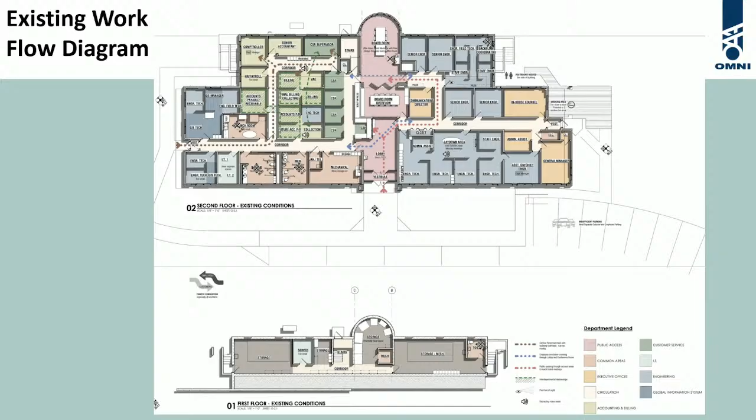The existing basement plan you can see here on the right side. It's mostly mechanical. The left side is IT and storage for the most part. You do have a little bathroom down there as well.

This would be the new layout. The existing here, this all pretty much stays the same. The IT space may get expanded a little bit. We're talking about adding a shower down here in the basement. Over here is the new piece.

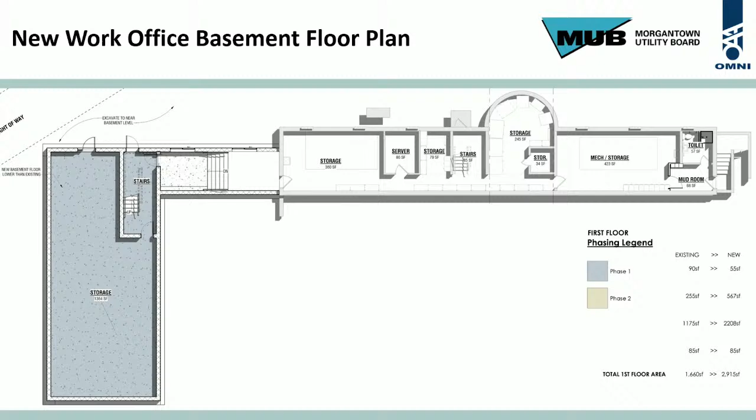So you're going to come out of the existing basement door down into this basement storage space. We have the ability—you'll see on the second floor plan, above this is the lunch space—to come down these stairs and possibly create an outdoor space here for your staff. The existing plan has a little outdoor space over here on this side, and that space is going to become interior space.

And you can see that here—that's this space over here, in here, and then this new addition down through here. You've got offices over here. Again, none of this has changed since most of you have seen this before. There may be a few little changes within the plan, maybe 4 or 5 little changes.

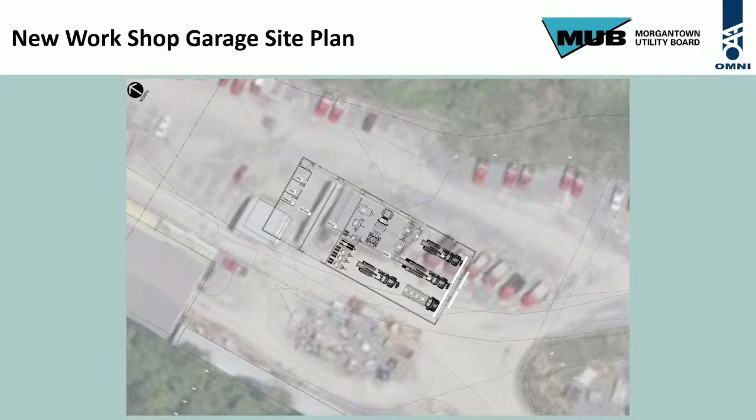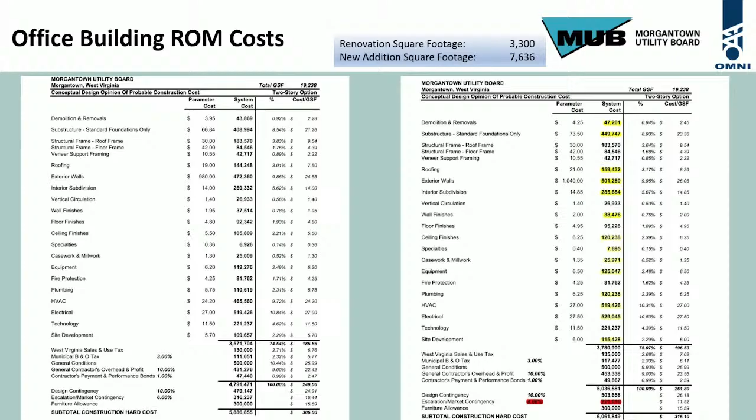How confident are you now in the landscape and topography here for being able to fit the building on there? I know that was a concern every once in a while on how we're going to be able to fit on the site. Yeah, the big concern was this addition over here and how quickly the grades fall off right here, and if there were some minimal slip concerns because of that.

We had looked at that most recently, and I presented that to the team last week, and we think we're okay. We talked about possibly doing a retaining wall for the walkway or using the building wall as a retaining wall, and I think the best option is to use the building as a retaining wall. The foundations in these back corners will go a little deeper, and that'll let that sidewalk and stairs sort of just rest on natural grade.

The electrical line doesn't pose a problem during construction? We're staying out of that right of way, just barely out of it. Now, will they have to set up some scaffolding to do the brickwork? Maybe, and drive some equipment back around there, yes, but we've stayed out of the right of way distance.

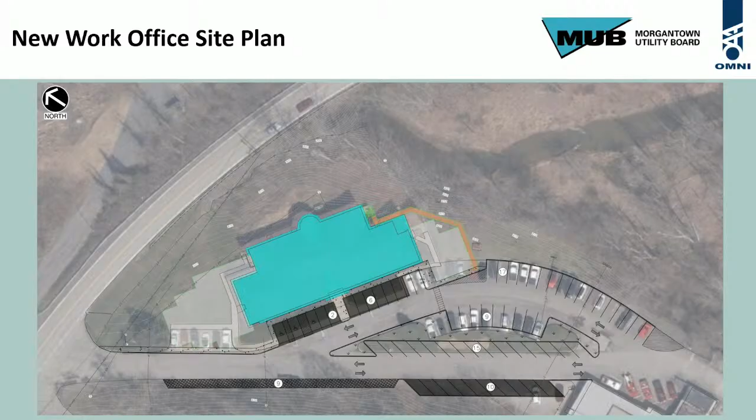Has much changed as far as the office space in the last 2 years? No, not really. We've tried to open up the lunchroom a little bit, make it a more pleasing space where people actually want to go in there and sit down. Design-wise, we're going to do a little bit more there, but we've kind of opened that space up, maybe get it a little more like a cafe style, just to make it more comfortable. We're adding some glass on the inside, just to make it more pleasing and feel more open. You don't really have very high ceilings over here, so I think trying to open that up. We've talked about some of that, and I think a couple people office-wise have moved back and forth, but I think that's about it.

The other question I might have is about fitting the current staff in here. I know that can happen, but how much additional staff space will be available for additional positions down the line?

Yeah, I think there's plenty of room for growth, both on the engineering side and on our business side. Okay, we'll have room for growth.

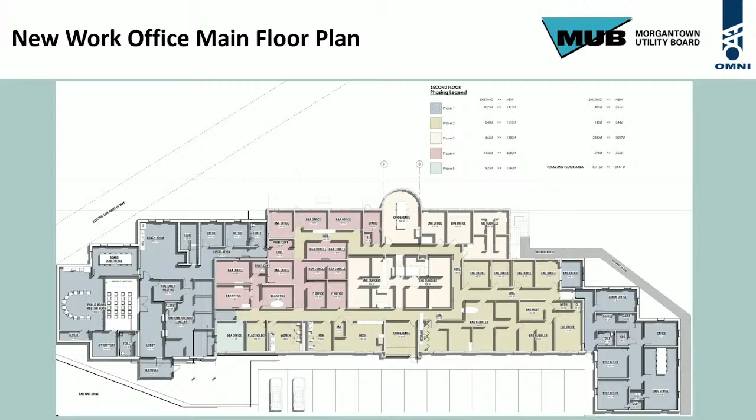How about the garage? We think that it will be adequate. So from the initial discussion, we did not take into account housing our tractor. Once we started discussions with Omni and went through an actual walkthrough looking at the equipment, we realized we really need to house the tractor indoors. We don't need that piece of equipment just sitting out in the weather all the time. So we did expand it just a tad, but I can't see us at this point needing any extra space than what we've got for some time, and we still have room out there if we need it.

Is this building scalable, the workshop, if needed in the future? Yeah, being that it's a pre-engineered building, more than likely this side and this side of the building will be the bearing points, so you could expand on this end of the building and also on this end. Okay, that's good. Just basically make the building longer.

My thought is vehicles have not gotten any smaller since the 1990s, and I imagine we're not going to turn that around going forward either. As you know, our newest vac truck is a beast.

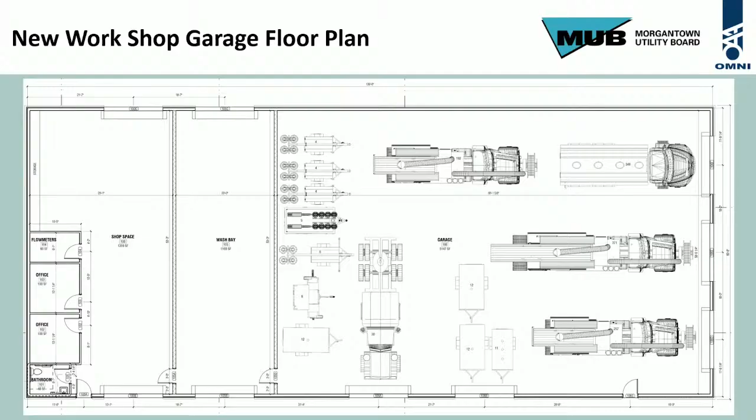Next, under old business is the Upper Popenoe Run Stream Restoration and Sewer Line Replacement Project, presented by Ken Hacker.

Good evening. For those of you who don't know me, I'm Ken Hacker, senior engineer here at MUB. I've been working on this project for quite some time now, maybe beyond a decade. So it's finished — Larita has completed the project, done a fantastic job. We've got a really good finished product here.

I'm going to run through the extents of the project, show you our as-built on our GIS mapping here real quick, and run through some before and after pictures that do a pretty good comparison. These stream projects are pretty neat — you actually get to see the finished product. So much here at MUB gets buried, put away, and you never see it again unless there's an issue and it gets dug up. So these stream projects are pretty cool. I think this is the third or fourth one I've been involved in since my time started here at MUB. I didn't know I was going to be involved in stream restoration projects so much, but here we are.

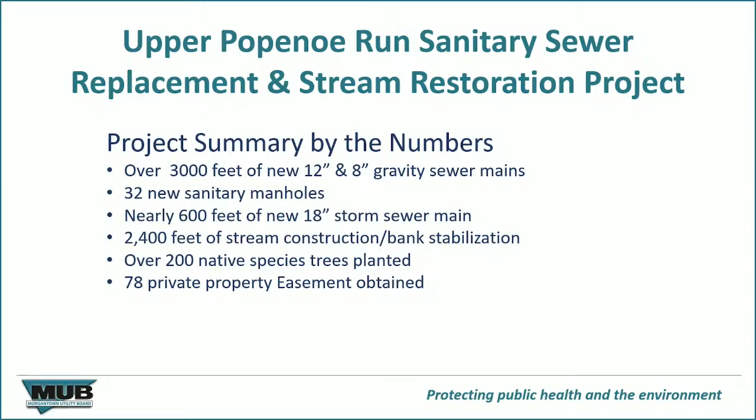Laurita Excavating was the low bid, just over $3.23 million was the winning contract. $1 million was committed to the project from the Mon County Commission, $1 million from the City of Morgantown, and MUB sewer funds are taking care of the remainder, just over $1.23 million. I forgot to mention that E.L. Robinson was our design engineer for the project, and All-Star Ecology was our stream designer and permitting and engineering agency for the project.

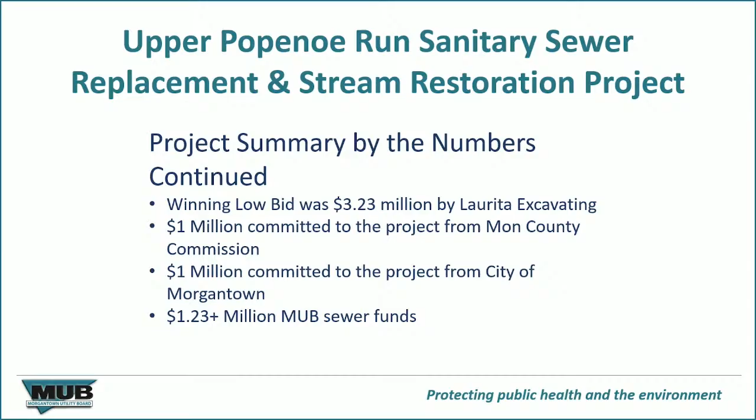So let me see if I can get this to work. We went out and located all of the assets that are part of this project — the dark blue line is the stream work.

These green circles with the black dots are the new manholes. The cyan circles are the new sanitary cleanouts that serve all the properties along it. The orange squares are new storm inlets, and the orange piping is the new storm sewer.

So if we look at where this project's located, it's close to the stadium. It runs from Willowdale Road here all the way up to Stewart Street up here.

So we zoom in a little bit. You can see where the project originated. The lower point was down here at just below Willowdale Road. Did a crossing. Going a little farther, you can see the stream structures, which are these little rocks. They represent structures that were put inside or within the stream when it was constructed.

I think there's 43 of those structures throughout this couple thousand feet of stream. What that does is stabilize that stream bottom. It doesn't let it erode out. The banks were restored with a matting, protective blanket, before vegetation was put on it. So the banks are now stable.

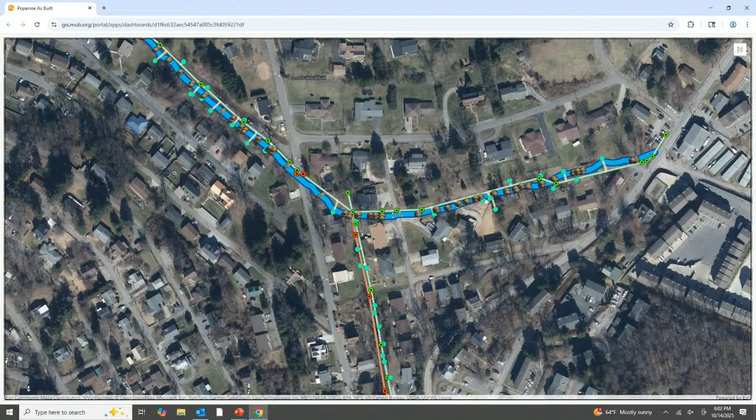So you can see how many structures are in the stream on this area. It's a little bit of a steeper section when you look at the overall grade.

So with that, I think we'll jump into some before and after pictures. This is just above Willowdale Road. I want you to pay attention to this building here. This is what we got after. This is that same building. So look at how narrow the stream was, how the banks were eroding up here.

This was very steep over here, so we ended up with a retaining wall, which you can see here, a natural stone retaining wall that protects that private property. Down here is the flood bench. So we now have another about 1 foot from the design flow line of the stream. This steps back approximately 2 to 3 feet on both sides of the stream, as you can see on this side as well. And it provides additional capacity for those larger events that we could see.

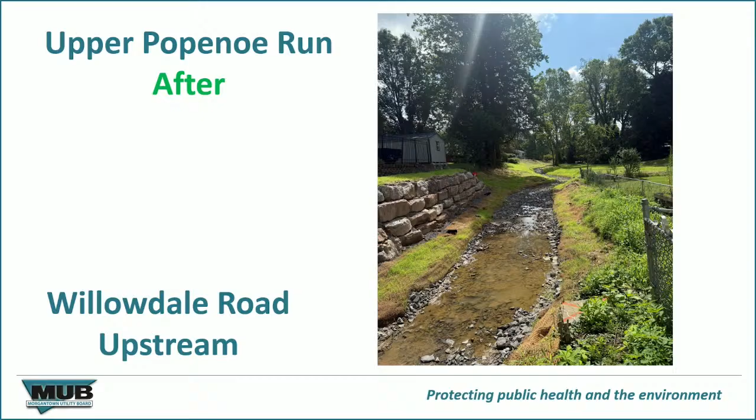And you just look upstream, there's no exposed pipes, everything's below grade. We drove the sanitary sewer main down about 3 feet, so that everything we can put under the surface and protect it.

Here's another before picture. Again, you've got the badly eroding banks on this side. You've got an exposed sewer lateral here going across the creek.

This is a large cherry tree that the property owner really wanted to keep. So we worked with that property owner, and that cherry tree is this cherry tree. So again, look at the difference between the eroded banks. This was probably 3 feet wide at max at the bottom of the flow line. We now have a 9 foot wide flow stream, flood banks, benches on both sides, and everything's buried below grade.

This is about midway up from Willowdale to Hoffman.

So here we are at Hoffman, looking downstream. There's several aerial sewers going across here. You can see the badly eroded banks happening here in between these tree stumps.

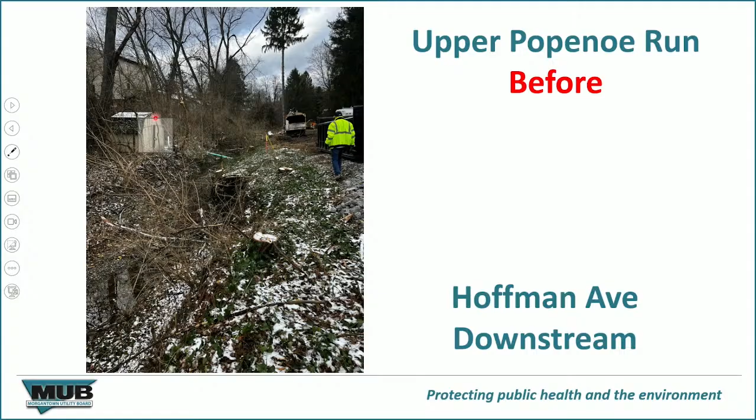This building, you'll see in the next picture, is still here. So this is the building that was in that last picture. And again, everything's buried below grade.

This is looking downstream from Hoffman. So there are stream structures in here. They're hard to see. I've got a picture towards the end of this that shows those much better, gives you a better idea how many of those are there. Still erosion sediment controls, which is what you see over here staking in the ground. If that hasn't been removed yet, that will shortly, now that everything's vegetated.

Standing on Bradley Street, looking towards Hoffman, you can see how filled in this channel is. There's basically nothing there. I've stepped across this many times, visiting with folks and going through different flooding problems. So that's what we have now.

Bradley Street, looking downstream towards Hoffman, and it wasn't just a brush clearing exercise. We removed a lot of material out of here to reestablish the stream, give it the proper geometry. And again, got all the piping below grade.

Same location, looking upstream. Again, not much of a stream left. Banks have eroded in, filled in, and then this is what we have now. We did actually catch this after a pretty decent rain event. It must have been really crazy, but it was working fantastic.

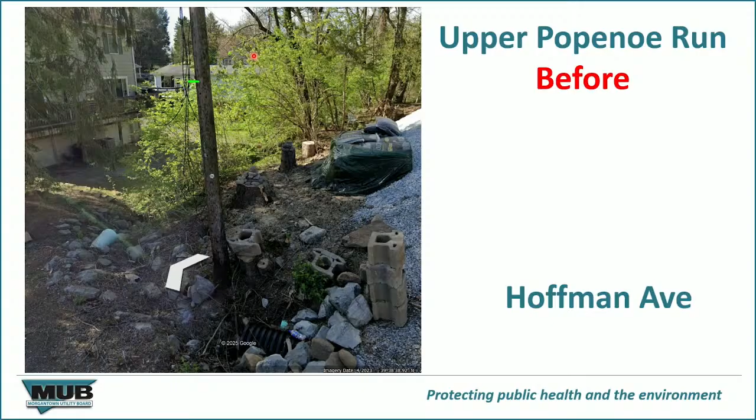It now is collected in a storm system here. It goes down and goes through the backyards, and that goes down and ends up in the run. It no longer goes under this house, and then there's a new sanitary sewer that runs up this bank and continues beyond that little dead end road that we're seeing.

So here is above Bradley Street, but you can see the structures in the stream. These are rock sills, and again, there's several of them up through here with the bends in the stream. Those were put in there, again, to stabilize the stream bottom. The slope was a little greater on this section of stream, so there's more of those throughout this.

So the stream work's done. Pipes are in the ground. Through the Army Corps of Engineers, we had to agree to a monitoring phase, as with any stream project. So we're now in a 5-year monitoring phase for this project.

We will analyze the stability of the stream bottom and banks each year. It requires cross sections, and I believe we also have to do a vegetation assessment to see how well the trees are growing and anything else that may come up. We submit that each year, and then after 5 years we get a release.

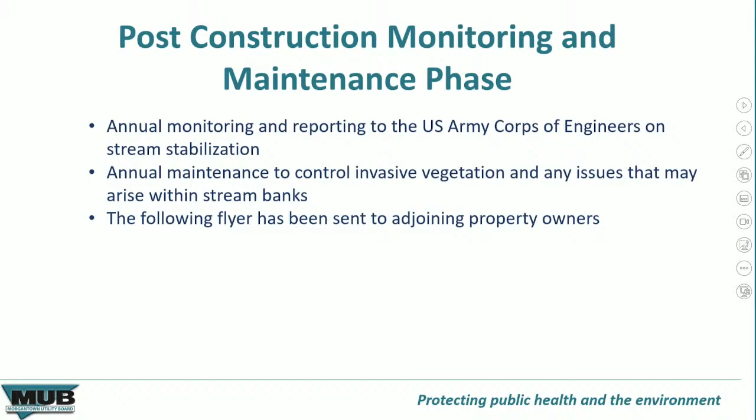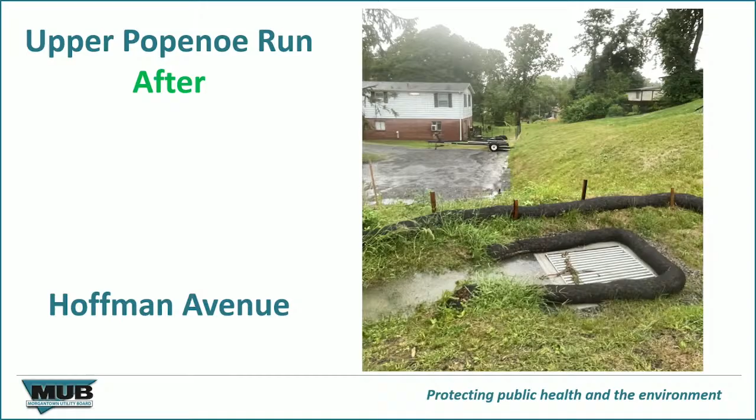So we put out the following flyer. I'll get back to that soon. We put together the following flyer and mailed it out to all the adjoining property owners, because it's a community-owned asset. Everybody needs to take pride in this thing and help maintain it, and let us know if something's going wrong, like somebody dumps a load of dirt in it, tries to fill it up.

It generated a lot of phone calls. A lot of people were asking questions, and I think they had a lot of good conversations. So I think that was a good thing, and we may look at doing this once a year just to try to keep it fresh in everybody's mind. But it's just not something we're going to put in and forget about.

So the project was nearly 100% within city limits. As you can see from those before and afters, we greatly improved the capacity of that stream. I don't know what percent number, but it's a lot. Stand out there and look at it, it's pretty neat.

The methods that were used ensure that this improvement is going to last for decades. And we felt that it was just an excellent partnership between MUB, County Commission, and the City of Morgantown that I think a lot of people benefit from.

So with that, any questions? It's a great project. Really appreciate your work and leadership on this.